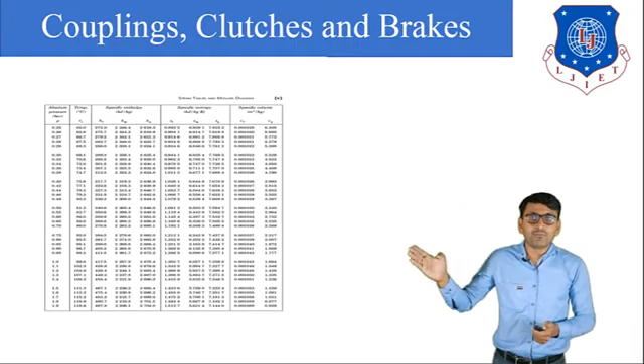This is normally a steam table that we have to use for the example purpose. In steam table there are various tables of temperature, pressure, saturated water and steam, etc. But in example of property of steam, we have to use only one table, which is of saturated water and steam, and in bracket there is a pressure.

So in this table, in the upper side, in the first column there is pressure, and pressure is in bar. In the second column there is saturation temperature. In the third column there is HF, that is sensible heat. In the fourth column there is HFG, it means enthalpy of evaporation. In the fifth column there is Hg, enthalpy of dry steam.

Then in the sixth column there is SF. What do you mean by S? That is specific entropy. So H, small h, is specific enthalpy, and small s is specific entropy. In the 7th column there is SFG. In the 8th column there is SG. In the 9th column there is VF. What do you mean by small v? That is specific volume. And in the last column there is VG.

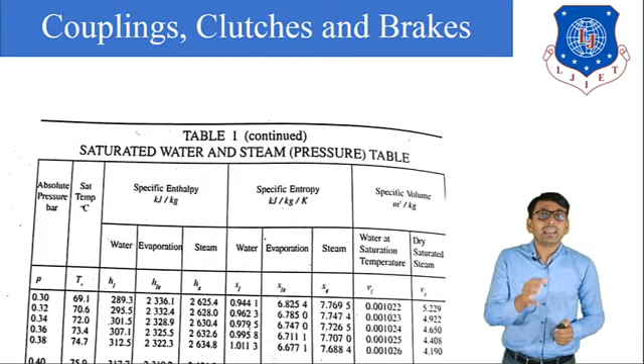So in example, if pressure is given, then according to pressure we have to find out saturation temperature, HF, HFG, HG, SF, SFG, SG, VF, VG from steam table. There are various pressures given in the steam table. So whatever pressure is given in the example, by using the steam table, we write down all these values. So we have to use this steam table to solve examples of property of steam.

Example number 1. Determine enthalpy and internal energy of 1 kg of steam at a pressure of 12 bar when, first case, the dryness fraction of steam is 0.8. Since dryness fraction is less than 1, it is wet steam. Second case, steam is dry and saturated. Third case, steam is superheated to 280 degrees Celsius, meaning superheated steam. So in this example we find enthalpy and internal energy for all three types of steam one by one. Pressure given is 12 bar.

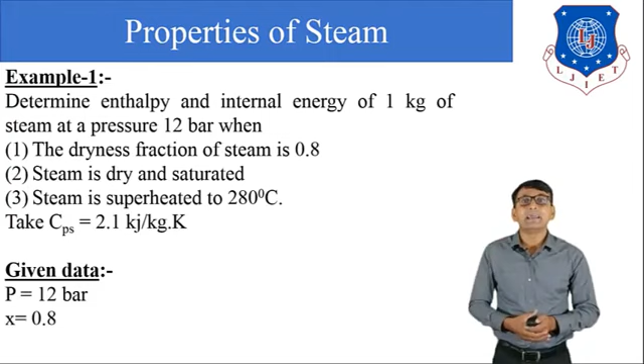CPS is 2.1 kilojoule per kg Kelvin. Now, given data for this example: pressure is given 12 bar, X, dryness fraction, is given 0.8, and T superheated is given 280 degrees Celsius.

Now, from steam table, we have to take a reading from saturated water and steam, and in bracket there is pressure. Use only this table, saturated water and steam, to take the values of HF, HFG, etc.

So from the steam table at pressure equal to 12 bar: HF is 798.43 kilojoule per kg, HFG is 1984.3 kilojoule per kg, VG is 0.1632, and T saturation is 187.96 degrees Celsius. These four values we take from the steam table at pressure 12 bar, using only the saturated water and steam table with pressure in bracket.

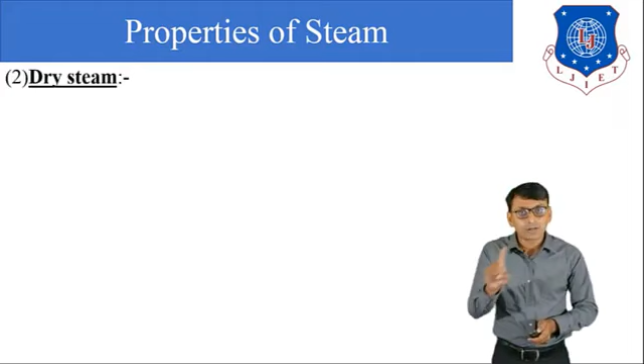Now second one, dry steam. Dry steam means it does not contain any water particle. Enthalpy of dry steam, H dry, is equal to HF plus HFG, which is also equal to Hg. By putting values from the above data, we get 2782.7 kilojoule per kg.

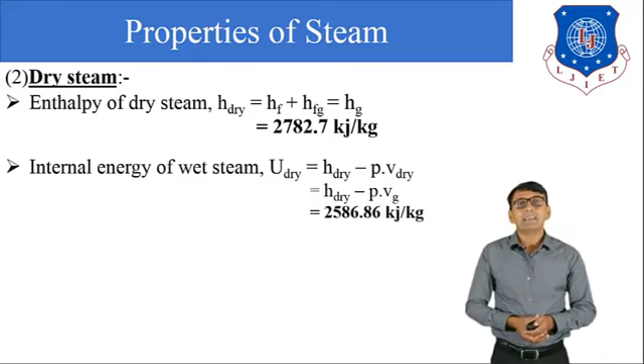Then internal energy U dry is equal to H dry minus P into V dry, where V dry is equal to Vg because X is equal to 1 for dry steam. By putting values we get 2586.86 kilojoule per kg. Now third one, that is superheated steam.

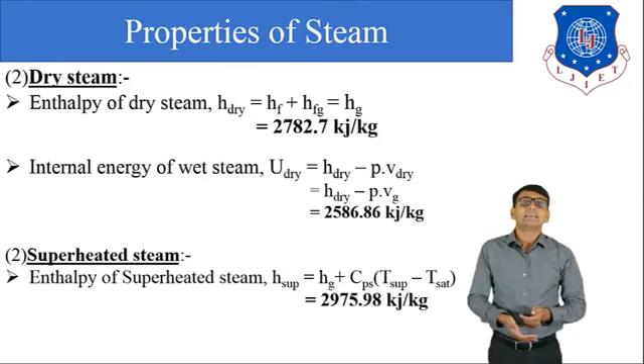So we have to find enthalpy and internal energy of superheated steam. First, enthalpy of superheated steam, H superheated, is equal to Hg plus Cps into (T superheated minus T saturated). By putting values from the above step, we get 2975.98 kilojoule per kg. This is the enthalpy of superheated steam.

Now specific volume of superheated steam is equal to V saturation into T superheated divided by T saturation. So by putting values from the above given data, we get 0.1962 meter cube per kg.

And at last, internal energy of superheated steam, U superheated, is equal to H superheated minus P into V superheated. From the above data we get U superheated is equal to 2740.54 kilojoule per kg. So this is about enthalpy and internal energy of wet steam, dry steam, and superheated steam in example number 1.

Now example number 2: determine the amount of heat required to produce 7 kg of steam at a pressure of 6 bar and temperature of 250 degrees Celsius, from water at 35 degrees Celsius. So heat energy is supplied to water and it is converted into steam of 250 degrees Celsius at 6 bar pressure. We have to find out how much heat is supplied to convert water at a particular temperature into steam at a particular temperature.

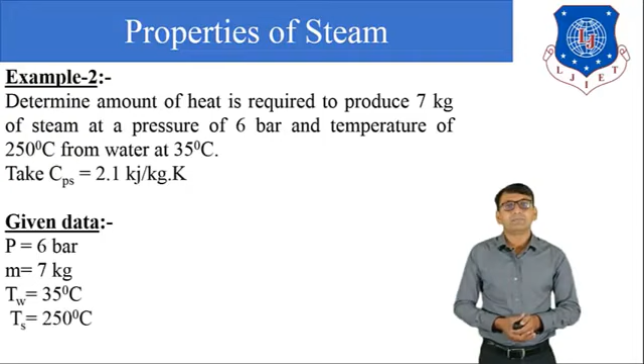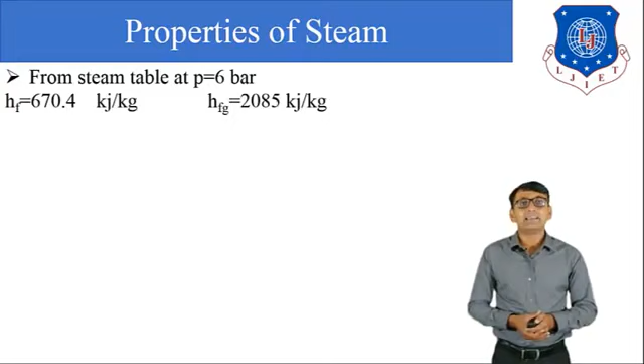So in this example, CPS is 2.1 kilojoule per kg Kelvin, and given data: pressure 6 bar, mass 7 kg, temperature of water 35 degrees Celsius, temperature of steam 250 degrees Celsius. From the steam table, at pressure equal to 6 bar, we get HF 670.4 kilojoule per kg, HFG 2085 kilojoule per kg, T saturation 158.8 degrees Celsius.

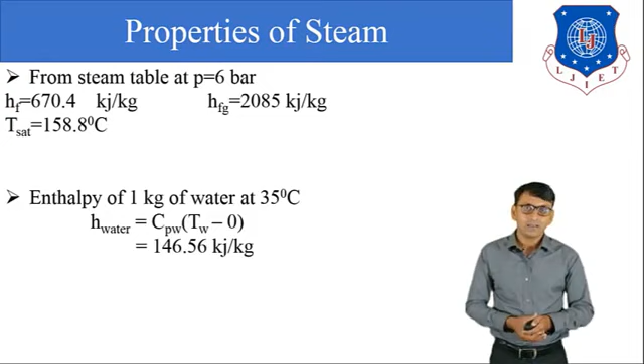First we find enthalpy of water. H water is equal to CPW into (TW in degrees Celsius minus 0). By putting values, we get 146.56 kilojoule per kg. So in this first step, we find out enthalpy of water.

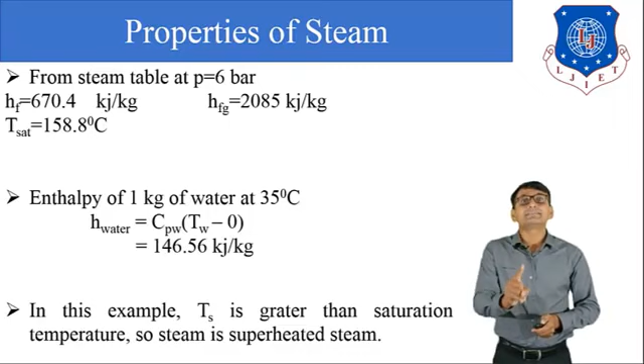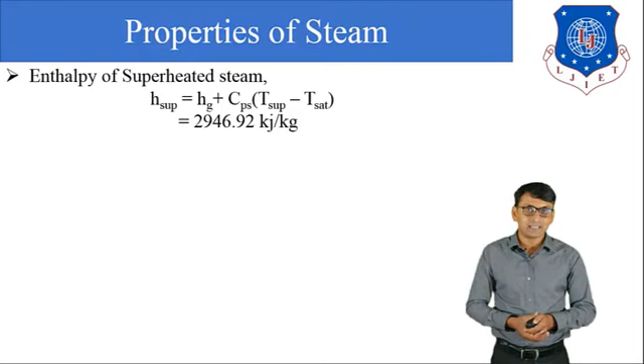In this example, temperature of steam is greater than saturation temperature, so the steam is superheated steam. So enthalpy of superheated steam, H superheated, is equal to Hg plus CPS (T superheated minus T saturated). By putting values from above, we get 2946.92 kilojoule per kg. So first we find enthalpy of water, then we find enthalpy of superheated steam.

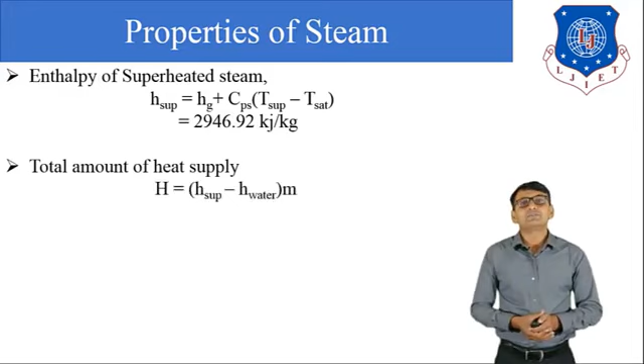Now the total amount of heat supply to convert water into steam is H equal to (H superheated minus H water) into M. By putting values, we get 19602.52 kilojoule. This is the amount of heat supplied to convert water into steam at a particular temperature.

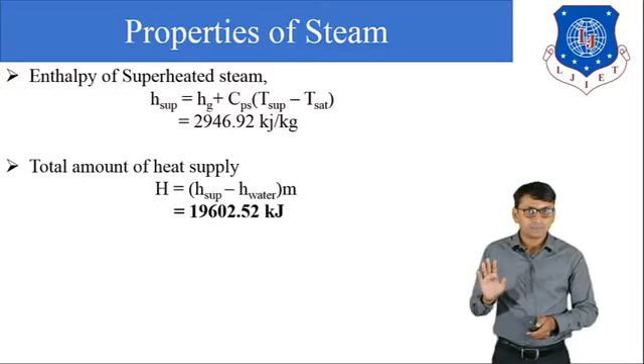Now we discuss one example of a combined calorimeter, that is combined separating and throttling calorimeter. Find the quality of steam supplied in a combined separating and throttling calorimeter. Quality means dryness fraction of steam. In this example, the calorimeter is combined, and we have to find out X, the dryness fraction.

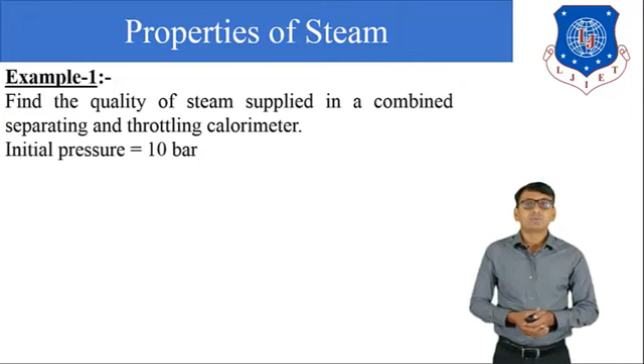So in this example, initial pressure is given as 10 bar, final pressure 1 bar, water separated 1.5 kg, steam discharged from throttling calorimeter 20 kg, temperature of steam after throttling 120 degrees Celsius.

In this example, given data: pressure P1 means pressure before throttling, and pressure P2 means pressure after throttling. So P1 is equal to 10 bar, MW (mass of water) 1.5 kg, MS 20 kg, P2 1 bar, and T superheated 120 degrees Celsius.

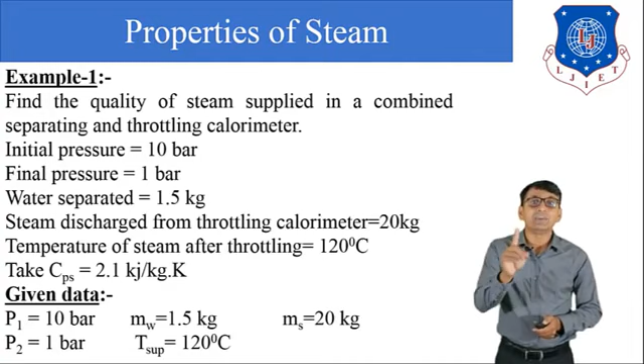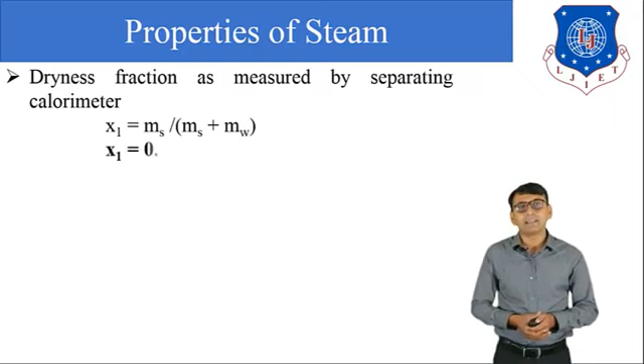So before throttling, steam is wet steam, and after throttling, steam is superheated steam. Now dryness fraction is measured first by the separating calorimeter: x1 is equal to ms divided by (ms plus mw). By putting values from given data, we get x1 equal to 0.93.

Then from the steam table, at pressure equal to 10 bar, HF1 is 762.6 kilojoule per kg, HFG1 is 2013.6 kilojoule per kg. So before throttling, pressure is equal to 10 bar, and before throttling there is wet steam.

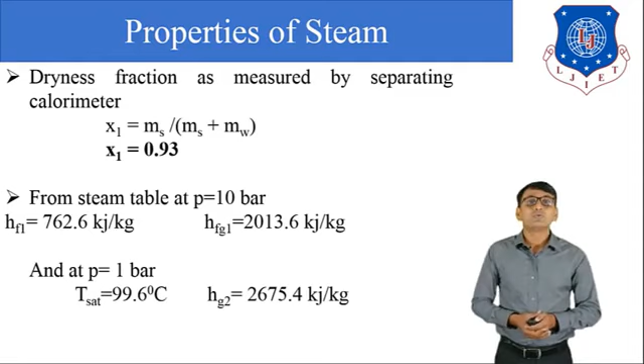Then at pressure P equal to 1 bar, this is the pressure after throttling. So before throttling 10 bar pressure, after throttling pressure is 1 bar. From this pressure, from the steam table, we find T saturation 99.6 degrees Celsius and Hg2 2675.4 kilojoule per kg. Now in the second step, enthalpy before throttling is equal to enthalpy after throttling.

So putting the equation HF1 plus X2 HFG1 (this is the equation for enthalpy of wet steam), and after throttling Hg2 plus CPS (T superheated minus T saturated), this is enthalpy of superheated steam. By putting values from given data and the above step, we get X2 is equal to 0.97. This is the dryness fraction measured by the throttling calorimeter.

Then the quality of steam, meaning the dryness fraction of wet steam original value, X is equal to X1 into X2. By putting values of X1 and X2, we get X is equal to 0.9021. This is the final value of X, that is the quality, the dryness fraction of wet steam.

So in this lecture, we discussed 3 examples, and in the third example, we discussed finding the value of X using a combined calorimeter. Okay, thank you.